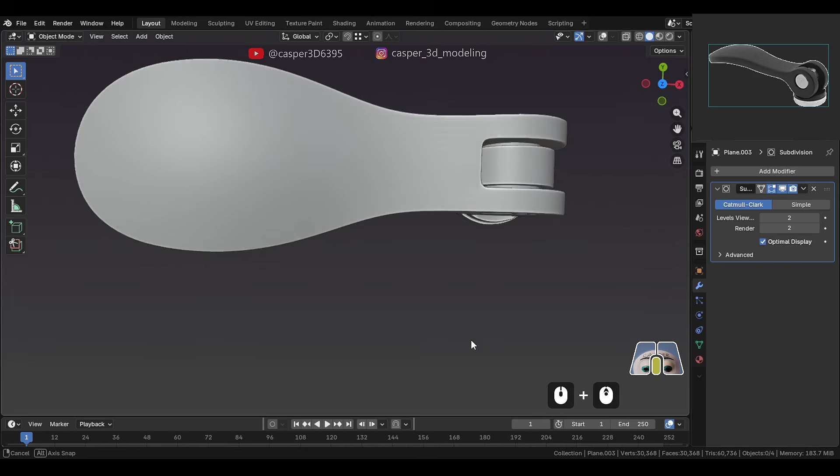Hey guys, welcome back. In this Blender video, we're going to model a mechanical cam lever handle, using some simple hard surface modeling techniques to create this model from start to finish. Whether you're here to practice or just learn something new, I hope you find this tutorial helpful. So let's not waste any time and jump right in.

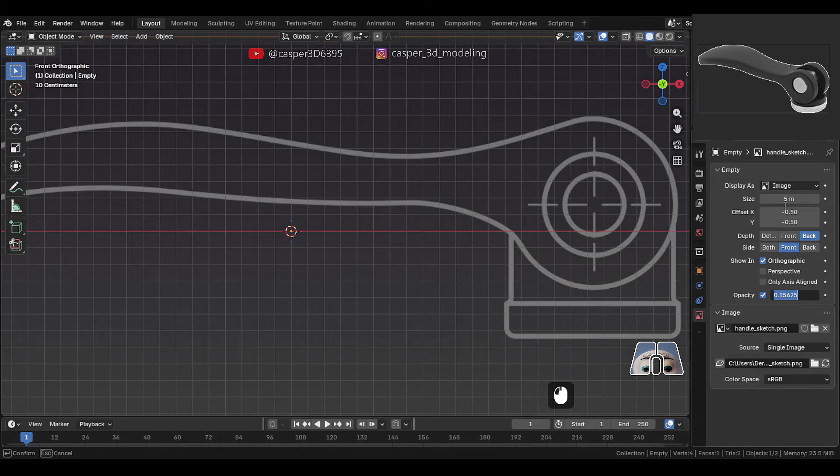First, let's add a plane mesh. Now I have a side view reference image of the handle, so I'll add it here and move it to the center. Let's decrease the opacity of the image so we can see everything more clearly. Let's scale the reference image so the handle in the reference image matches the size of the plane.

To make it easier to see, I'll quickly extrude the plane upward. Now scale the handle in the reference image until it matches the size of the plane. I'll position it something like this. Now delete the top part that we extruded. Next, we'll scale the plane from the side.

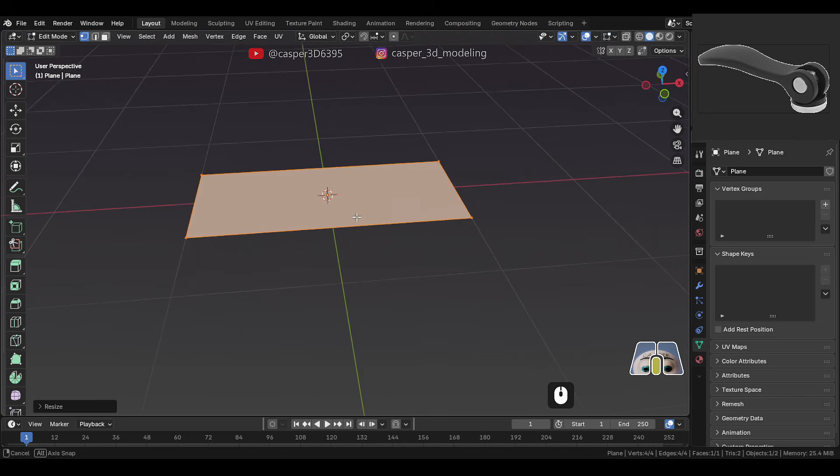So how do we know the exact size? If you look at the reference image, there's a circular cylinder-like part here. We can use that to get the correct size. So let's add a cylinder and position it on that part to match.

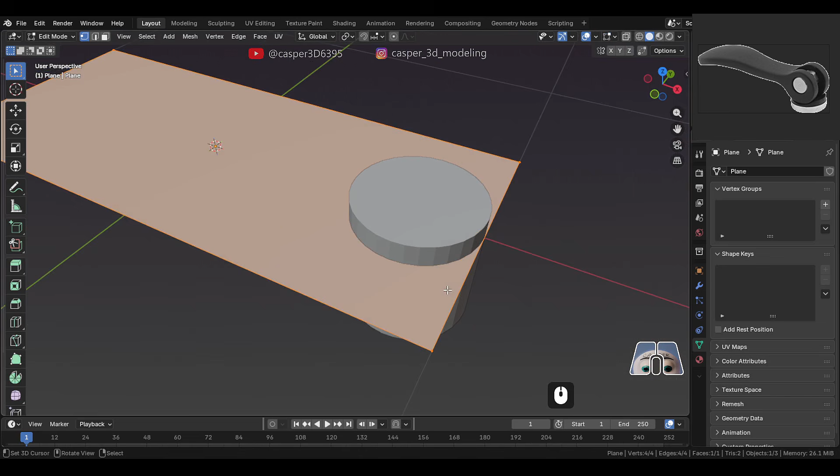Now scale it until it matches the size of the cylinder in the reference image. Once that's done, we can scale the plane from the side to match the size of the cylinder. Since the cylinder is perfectly round on all sides, we know the plane is now scaled to the correct size. Scale the plane and keep it slightly inside the cylinder. Now hide the cylinder and let's work on the plane.

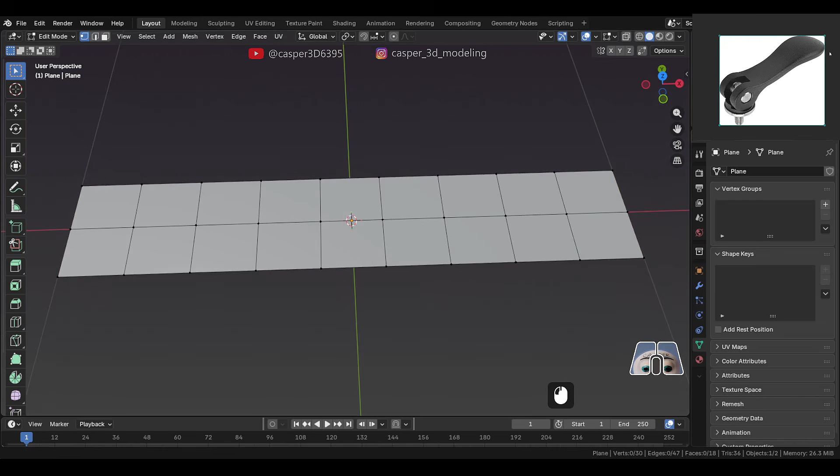Add a loop cut right in the middle. Then add a few loop cuts on the other side, keeping this nice and even and square. Now if you look at the reference image, the front part is slightly broader, so let's make that part a little wider.

First, turn on proportional editing, then change the fall off type to inverse square. Now using the scroll wheel, while scaling in the Y direction, adjust the fall off to make this part a little wider. Now change the fall off type to sharp, and scale over here to get this shape properly.

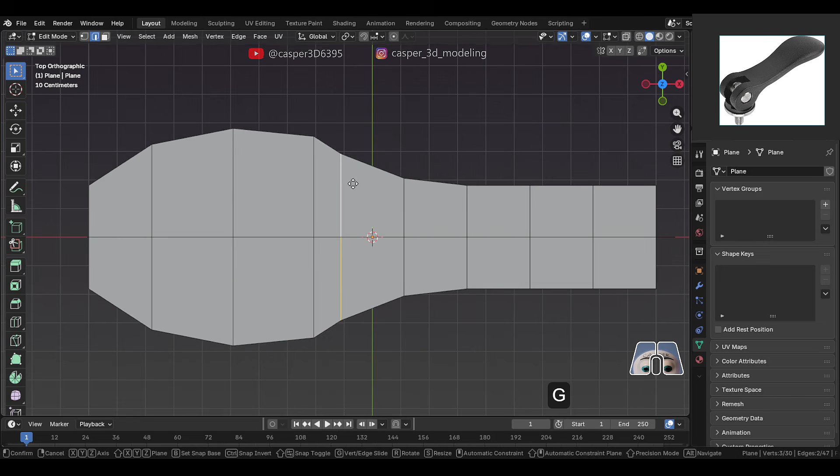Here, I'll just move these edges a little farther, so this area stays nice and even, square, and evenly spaced. Then over here, just fine-tune the shape a little so it looks right.

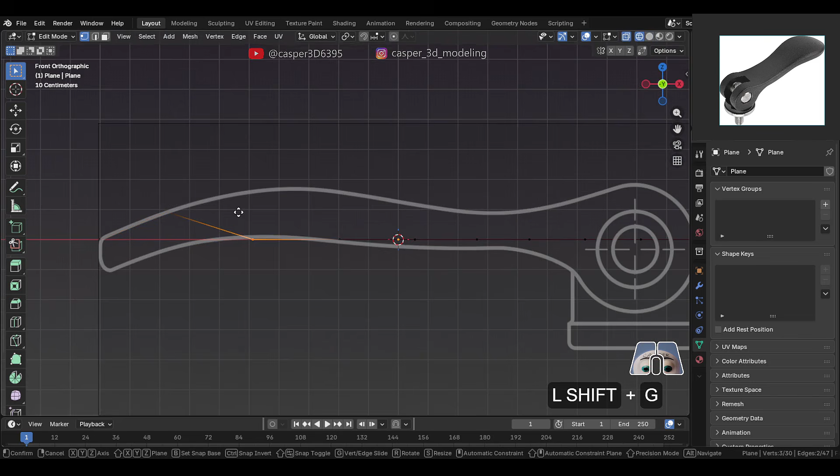Now that the top side is done, let's adjust the shape from the side. Select and move these vertices, one by one, adjusting them to match the handle in the reference image.

Now this part here is slightly lower, so let's select those vertices and then move them down a little to get that nice curved shape here. Move them down like this, shaping it nicely here.

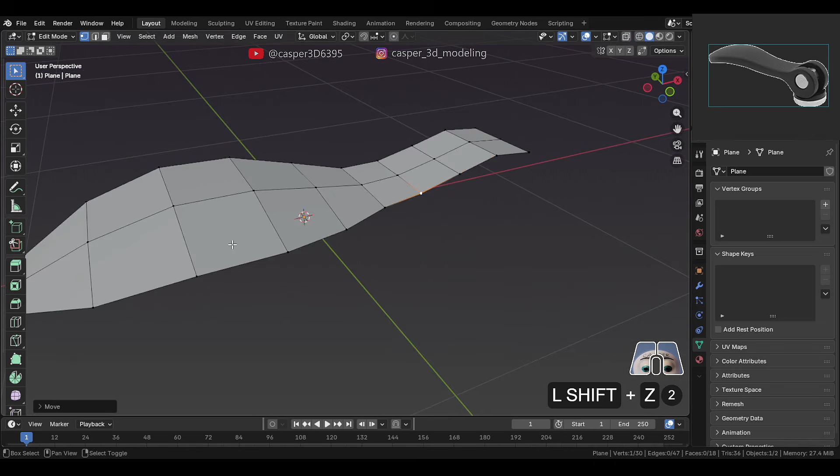Now that the top part is done, let's select the whole thing and then extrude it down for the bottom part. Now just align the vertices with the bottom sketch line in the reference image.

Now here we've only tweaked one side. To mirror it to the other side, let's use symmetrize. Then in the bottom corner, choose the correct axis to mirror.

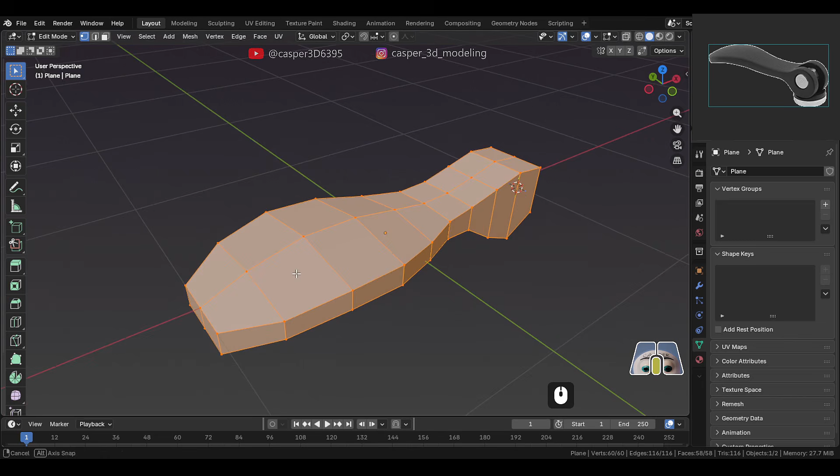Now we need more geometry to add the other details here. So let's add a subdivision modifier with one level, and then we'll apply it so we get that more geometry. Before we apply it, we need to maintain these sharp edges. We don't want to bevel them because that will add unnecessary geometry.

So instead, we'll add a crease for now for all sharp edges. Here, delete these back faces. Then select all the sharp edges. To select them quickly, go to Select and choose Sharp Edges. This will select them quickly.

Unselect the edges that we don't want to make sharp. Then press Shift-E and add a crease. This will maintain our sharp edges there.

Now, after adding the subdivision surface modifier, the mesh will become smooth and it will shrink a little. So just move these vertices here to get the shape right after the modifier. Just tweak them a little.

Now that this is looking good, let's apply the one-level subdivision modifier. Before applying it, you can keep an extra copy of the mesh just in case something gets messed up later.

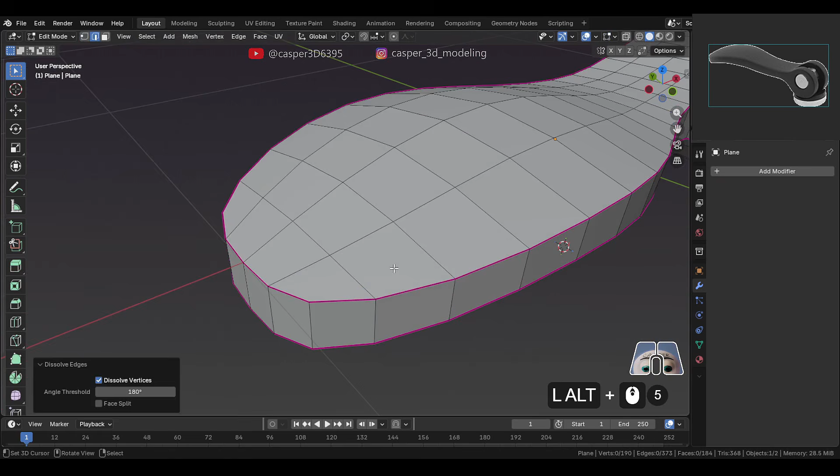Then go ahead and apply the modifier. Dissolve this edge, we don't need it over here. Now on this corner, connect these vertices by pressing J. Connect at both top and bottom. Then select these edges and dissolve them. I did this to route the edge flow around the corner, keeping the geometry clean and pushing that intersection point

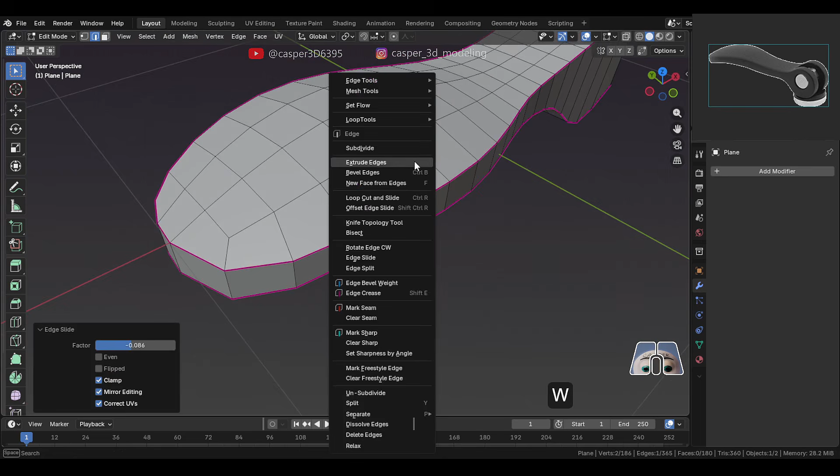away from the border. Now here, slide these edges so everything is spaced out nicely. We can also select this edge and use Set Flow, so this curve looks nice and smooth. Now here, we'll remove the crease we added by pressing Shift-E. Then drag this all the way down to -1, or press -1 on the keyboard. After that, let's use Symmetrize.

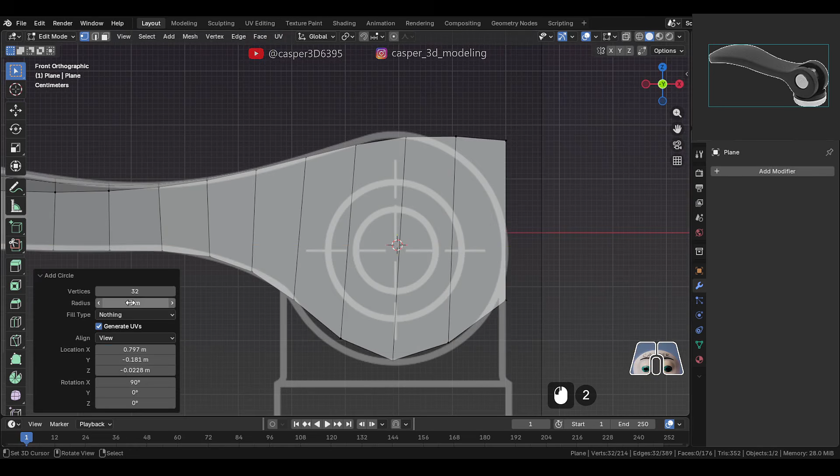Now we'll work on this back circular part. First, place the 3D cursor over here. Then let's add a circle. Set it to View, so it faces the view. Then set the vertices to 16, a little lower, so it's easier to connect this nicely. Now scale it, and match it with the circular part in the reference image.

Then extrude and scale the circle toward the outer side. Now we'll connect the main mesh with the circle. Delete the extra back part first.

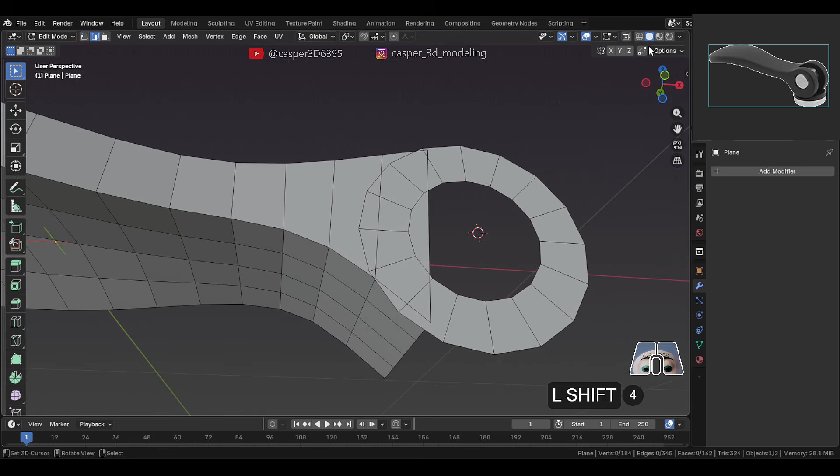Now turn on Auto Merge here at the top. Then select this edge to snap. First, change the snapping type to Vertex. Now move this edge and snap it to this vertex. Press S, Shift Y, so it only scales on the X and Z axes and not the Y axis.

Now delete this part. Snap this edge over here. Delete this part as well. Now select all these edges. Then press F to fill here.

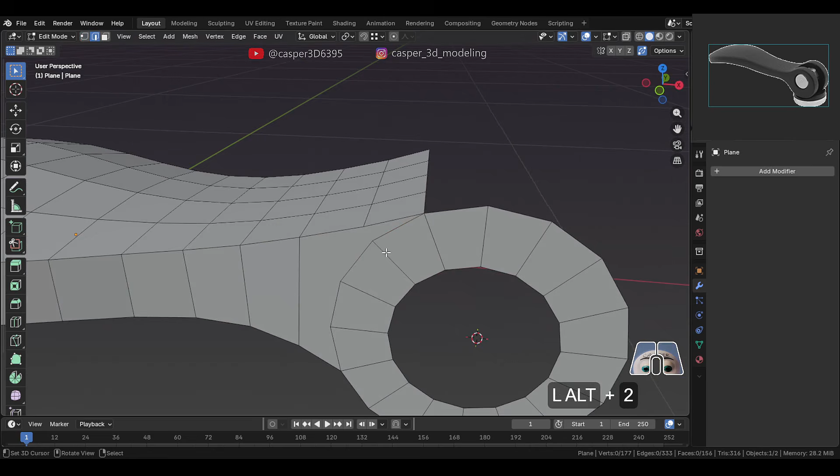Now extrude this circular part and snap it to the inner part. Delete these faces here. Now select this edge. Then extrude it to the middle and snap it there. Check if everything is connected properly. We'll also delete these faces here, so this area opens up more. Then connect these vertices here to fix this.

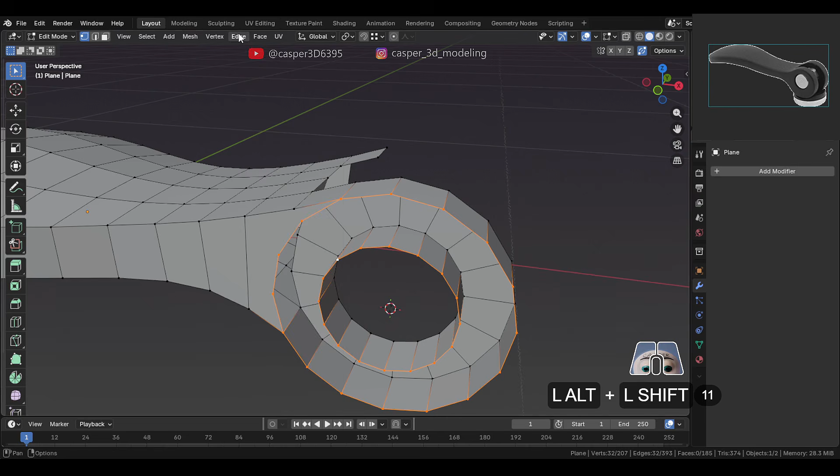Now select both these edge loops, then use bridge edge loops to connect them. Now to fix this here, move and snap these vertices like this. And now that's fine there. Now let's use Symmetrize to mirror it, and now that's looking perfect.

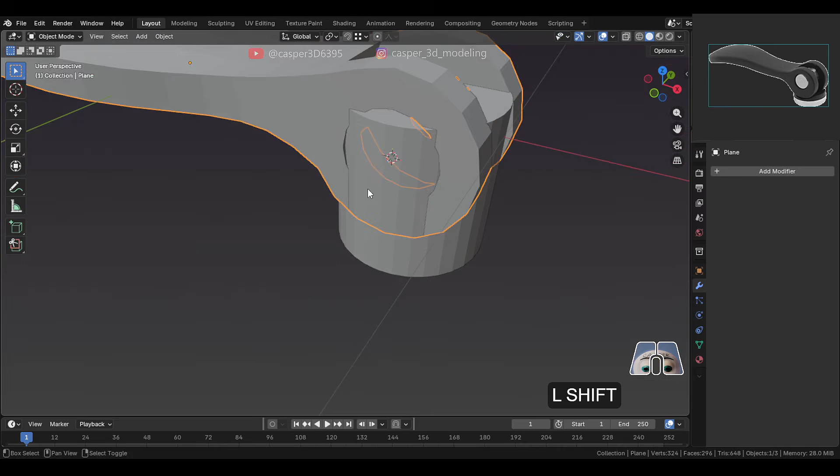Now we'll work on the bottom cylindrical part. Unhide the cylinder that we added at the start. First, move the top face of this cylinder down. Now snap it to this vertex, lining it up with that vertex. Now we need to cut the cylinder where the top circular part is intersecting using a Boolean.

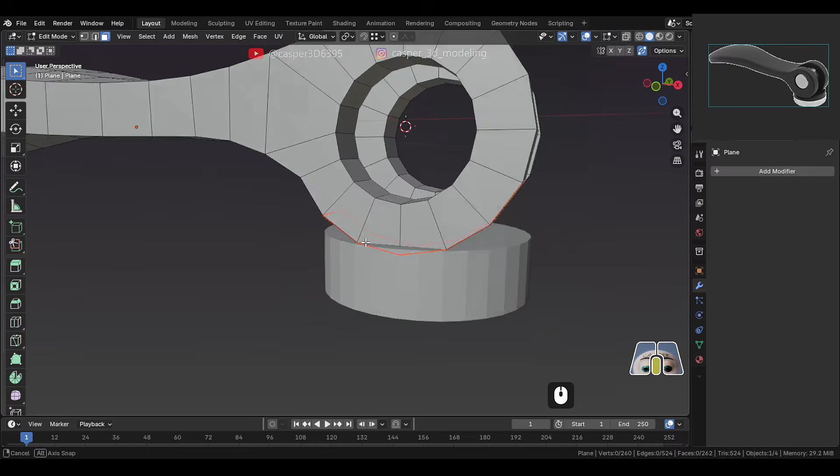First, select these faces of the bottom part. Press Shift-D to duplicate them. Then separate them by selection. Now we'll use that separated part as the Boolean target to cut the mesh. Here, scale this part sideways and make it wider so it cuts through the entire whole side mesh.

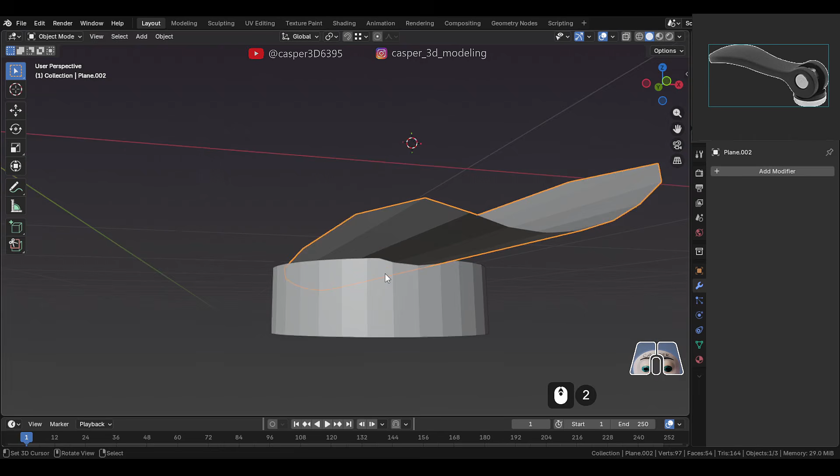Now let's add a one-level subdivision modifier to the mesh so it has more geometry, becomes nicely smooth and curved, and matches the bottom cylinder better for connecting. Then apply the one-level subdivision modifier. Now snap the top face of this cylinder, aligning it with this edge here. So snap with that edge, vertex, so it connects perfectly later.

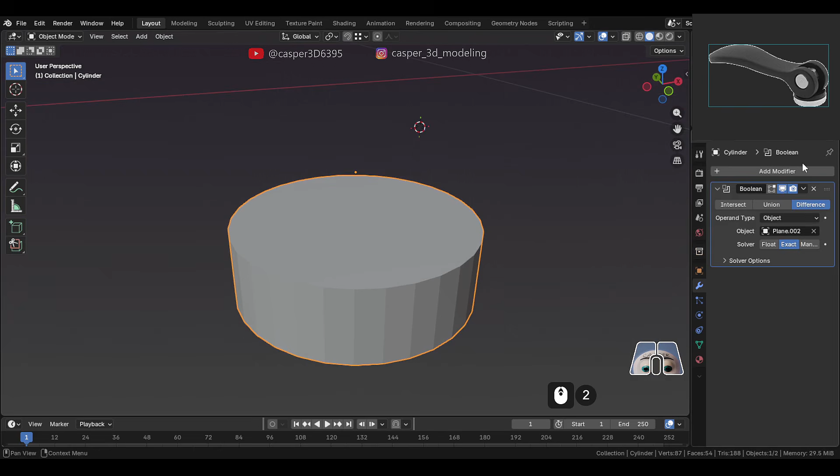Now add a Boolean modifier to the cylinder. Then use the eyedropper and select the separated mesh as the target. After adding the Boolean, the mesh isn't cutting. To fix that, change the solver from exact to float. And that works, now it cuts the mesh. Now that the mesh is cut, apply the Boolean modifier.

Now slide and connect these vertices that aren't connected. Dissolve this unnecessary edge here. Now select the whole mesh, press M, and choose by distance to merge any overlapping vertices left after the Boolean. Now connect these two vertices by pressing J to add a cut in the middle.

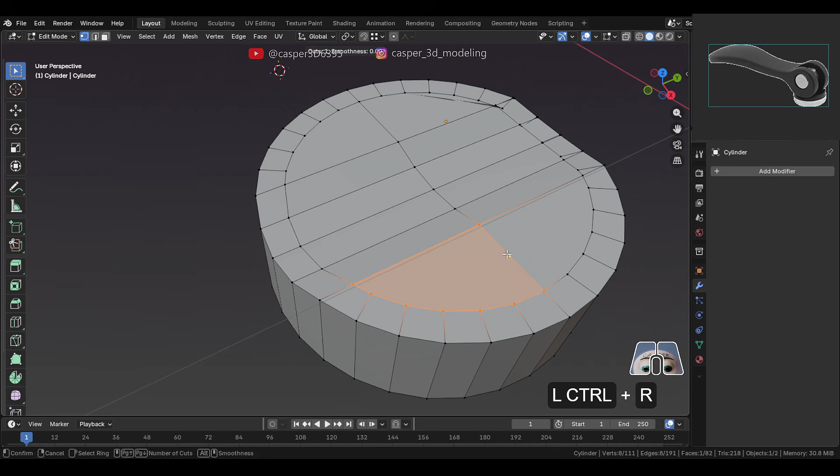Now select these top faces, then inset them inward a little. Now after the inset, this edge isn't straight. To fix that, enable Edge Rail in this panel. That will keep the edges straight and maintain the shape. Now let's build perfect quad geometry and remove the n-gons. Add two vertices here by pressing Ctrl-R. Then connect these vertices.

Now add 4 loop cuts here, then connect these vertices like this. Slide this vertex a little, and slide these vertices as well to make this area nice and even. Now do the same on the other side.

Connect these vertices like this, then add 2 loop cuts here. Connect these vertices here, add another cut and connect these vertices, then slide this vertex a little. Now select the whole mesh and use Symmetrize to mirror it over to the other side.

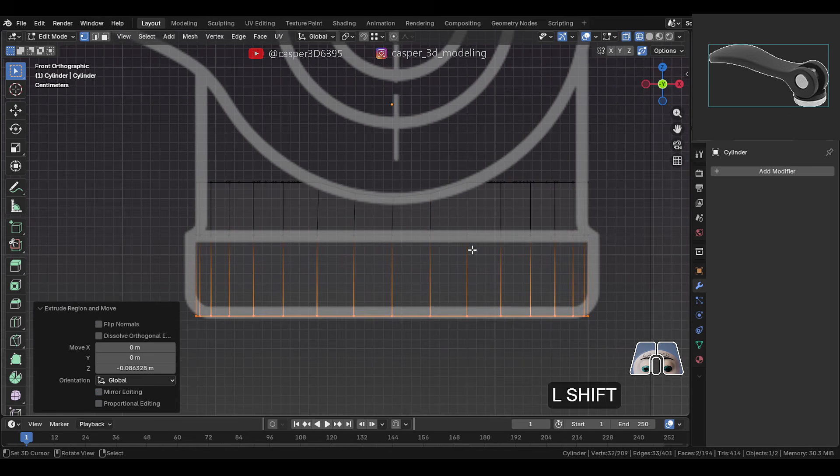Now we'll do this bottom part. Select the bottom faces of the cylinder and move them up to here, then extrude them downward. Since this part is a little wider, select these faces, press Alt-E and choose Extrude Along Normals, then extrude them outward a little like this.

Now at the bottom, select this part and scale it in a little. After that, use grid fill to fill this perfectly, then in the bottom corner panel, tweak the value to align the edges so they're nice and straight.

Now select these edge loops, then bevel them, make the profile shape 1, and add a loop cut in the middle. Now let's bevel all the sharp edges of this mesh.

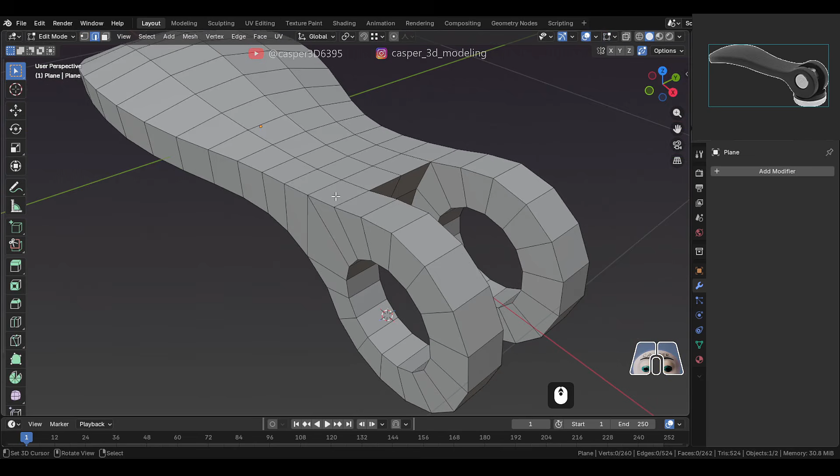First, recalculate the normals by pressing Shift-N, then apply the scale. Now before beveling all the sharp edges, let's bevel only this edge over here, because we want to keep this part a little rounded.

Now connect these vertices like this so we can bevel this area cleanly. At the bottom, connect these vertices as well.

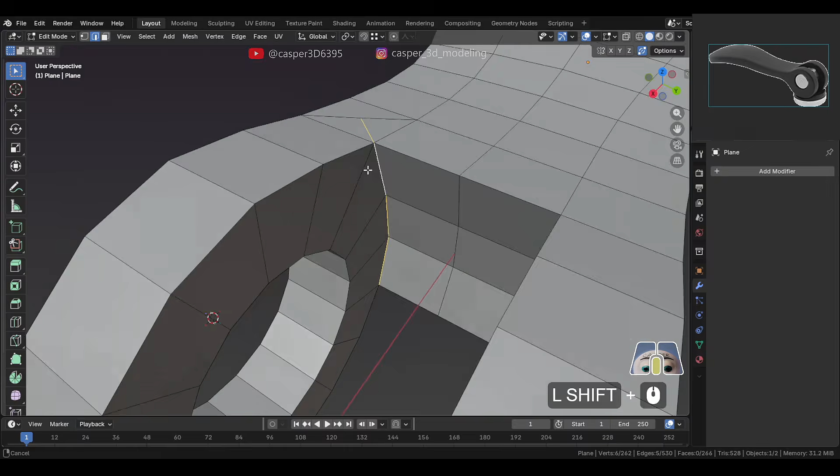Now select the edges of this part, then bevel them. Keep the profile shape at 0.5 so this part stays a little rounded. If it's too sharp, you might get a few artifacts on this part.

Now dissolve these edges over here and keep it like this. At the bottom also, make sure you dissolve those edges.

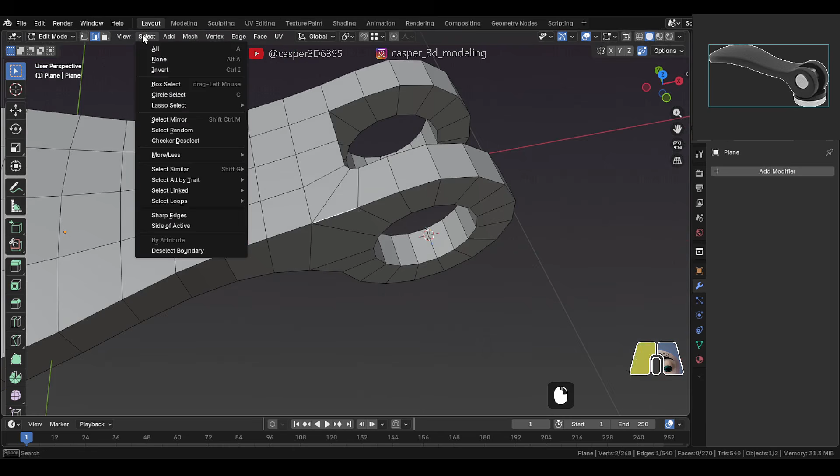Now let's bevel all the sharp edges. To select them quickly, go to Select and choose Sharp Edges. Now unselect the edges where we don't want the bevel. We've already beveled this edge, so let's unselect it. Once everything is selected properly, bevel the edges.

This time, keep the profile shape at 1. Also change this to Arc and turn off Loop Slide. Now you can see this part is nicely rounded while the other side is still too sharp.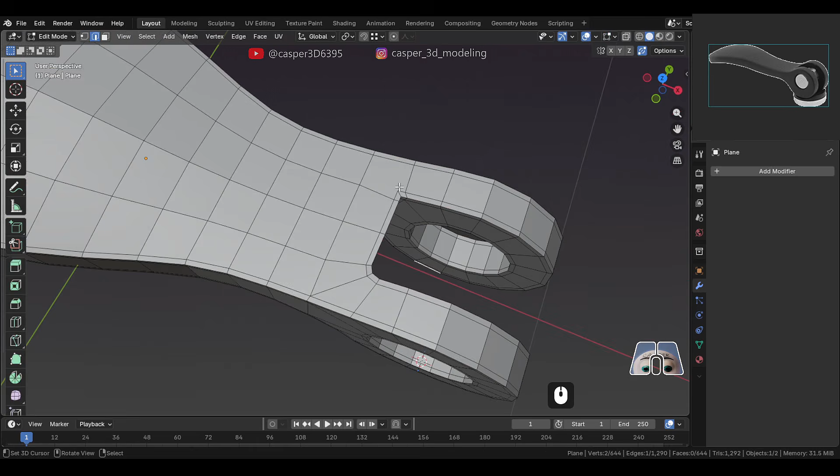Now let's add a subdivision surface modifier, then shade the object smooth. Now you can see the difference between both sides.

The side with the 0.5 bevel profile is nicely rounded, while the other side is too sharp and might have a little pinching. Now we can just symmetrize this to the other side.

Here, let's make this circular hole slightly smaller. Now let's symmetrize the mesh to mirror it to the other side.

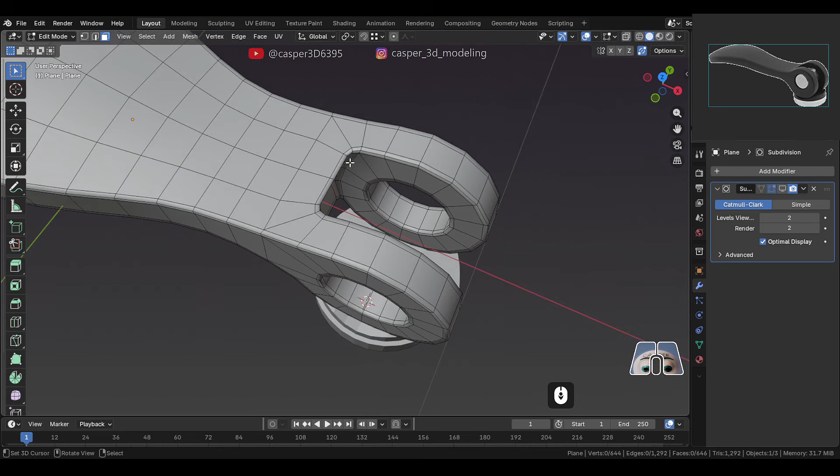Now let's create the rod passing through the middle here. Select these faces over here, press Shift-D to duplicate them, then press P and separate them by selection. Now select this edge and snap it all the way to the side.

Then snap this edge loop on the other side, and add a loop cut in the middle. Now move this part slightly outward, and add a few loop cuts over here.

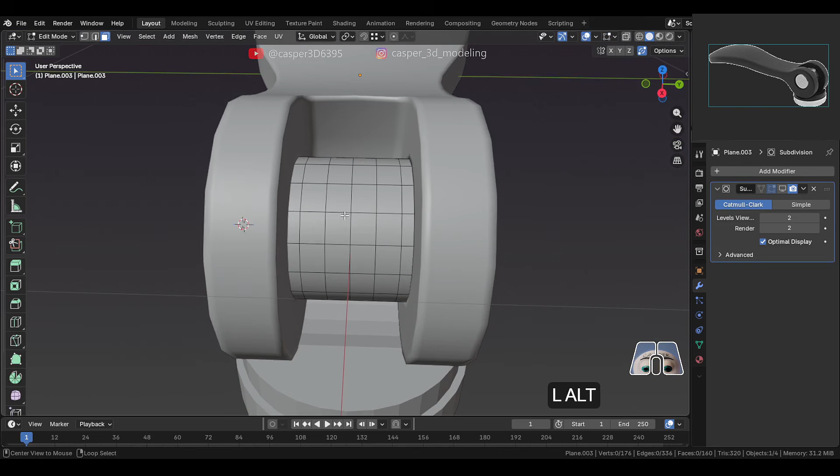Then symmetrize this mesh. Now select these faces over here, press Shift-D to duplicate them, then separate them by selection. Now extrude and scale this out a little.

Select this edge and fill it, then inset it inward. Now use grid fill, then align the edges so they're straight. Now bevel this edge, then symmetrize this mesh.

Now let's connect this part to the bottom part. First, select both objects and press Ctrl-J to join them into one.

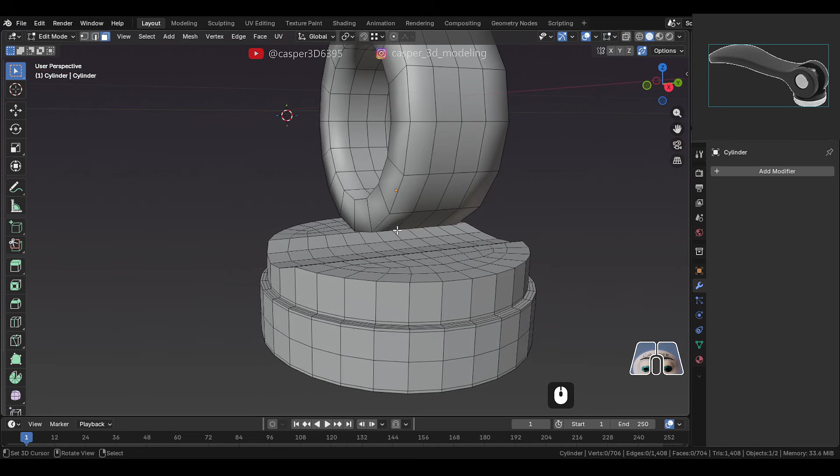Now select these faces over here, then on the bottom part, select the same number of faces. Now use bridge edge loops to connect them.

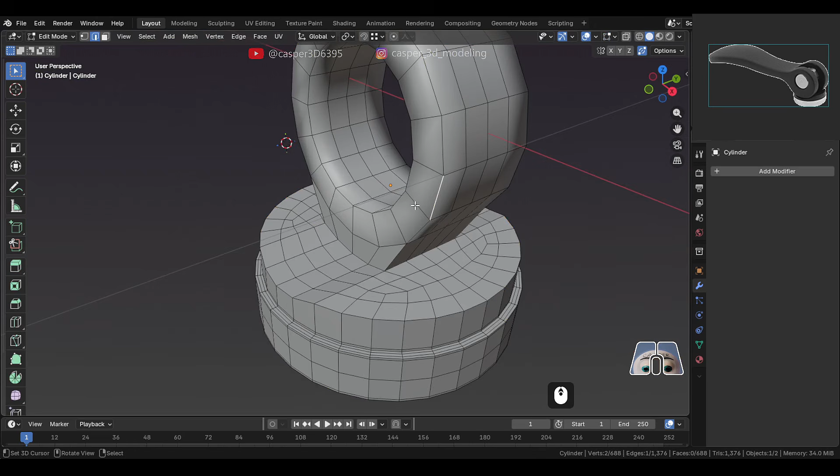Select this edge, then press S, Y, 0 to flatten it and make it straight. Now move and snap this edge to straighten it. Now that this is connected, let's bevel these sharp edges to keep them sharp.

Select all these edges here. Once selected, bevel them. Now use Symmetrize to mirror it to the other side.

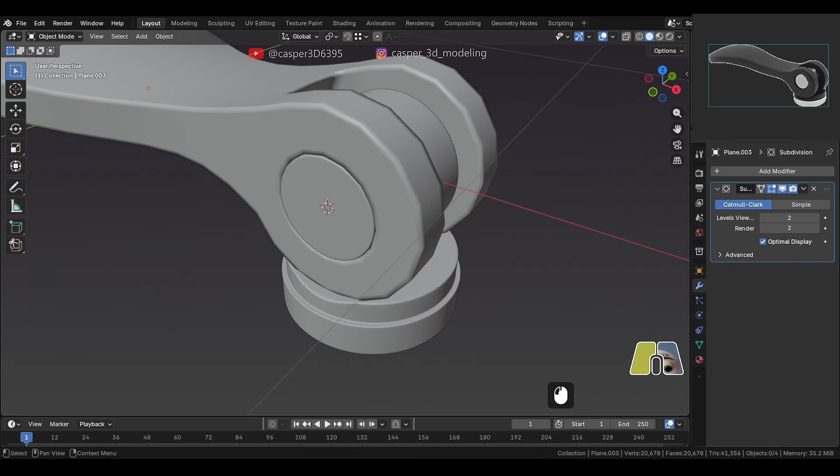Now add a subdivision surface modifier, shade it smooth. Shade the other parts smooth as well, and add a subdivision modifier also. Now this part is done perfectly.